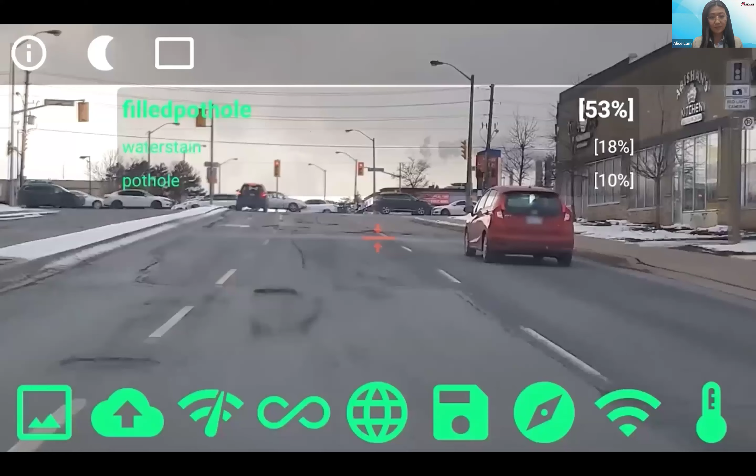Rover is a smartphone mounted on the windshield of a vehicle. We use the device camera to inspect the roads. There's a box that flashes every time it sees a pothole, and it does it a lot faster and more efficiently than a person does. Rover analyzes about 50,000 pictures per hour.

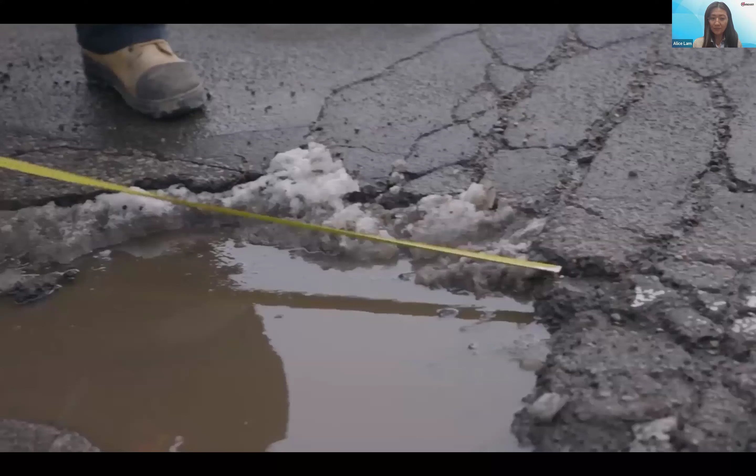Prior to the Rover program, we had to drive around, find the pothole, write it down, get out, and measure it. Patrollers patrol by themselves, so there's no one there to watch your back as you're getting out and doing this work, especially on a high volume road. With the Rover, you don't have to get out of the vehicle, it's all recorded, and you're much safer.

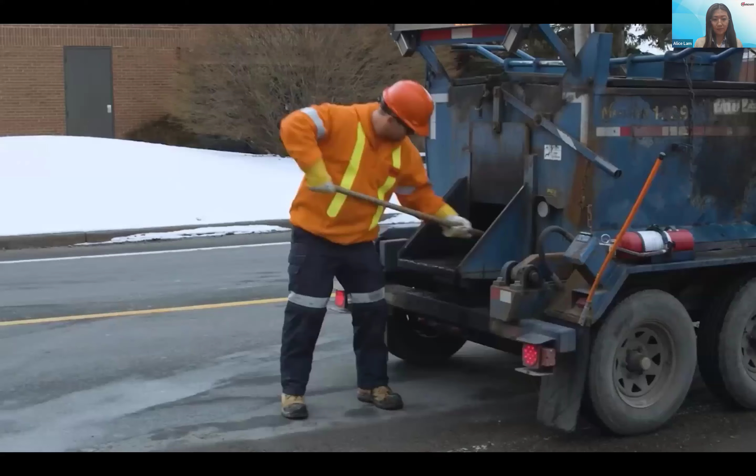Back here at the office, we see the information that's uploaded to the database. We see images, pictures of the actual potholes along with the GPS coordinates, so address, location, time of day, and then we export that data to a spreadsheet and assign information to a crew to go out and do repairs as soon as possible.

I'm not eliminating a job, but I am able to relocate this labor to do other work, such as focusing on other items on the road. By proactively fixing the pothole right when we first pick it up from Rover, within a week, we prevent water from getting in and damaging our infrastructure.

The cost saving is humongous. Working with over 100 cities in North America, we can quantify that the savings are in the millions of dollars, for cities ranging in all sizes.

Rover is a smartphone technology, and all smartphones are now being phased to use 5G. I do see vehicles using technologies like Rover, like car manufacturers, integrating their cameras and sharing information between vehicles more often, things like what Rover picks up, such as potholes and debris.

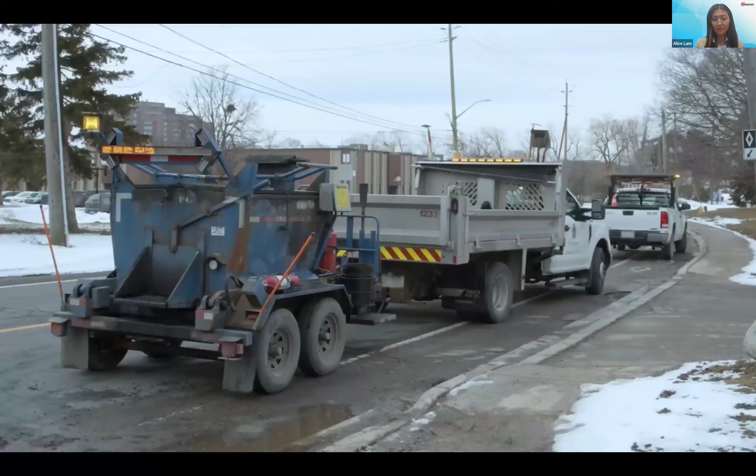Potholes is just the beginning. With the onset of 5G, you're going to see a lot more data being able to be communicated, whether it be pavement condition, manholes, catch basins, signs, curbs, sidewalks. With 5G coming, it will really allow all this technology and the AI industry to expand to the next level, to cover a lot of different tasks in our daily life.

Thank you, Roy. And usually after this presentation, I'll provide a disclaimer. In the City of Markham, we usually do not repair potholes when the road is wet. But you know, this is actually a short video clip that we filmed in partnership with BBC Earth

documentary for the future of 5G. For the filming on that day, we had some water on the road, so I always like to say that. And so maybe this is the first phase.

Today's presentation is going to be in different sections. The first section will talk about this AI CityRover pothole detection technology. Then a different section will talk about pavement rating and what we're getting into.

So how and why we started with this program. When we were in the City of Markham, when we were first approached by Visual Defense with this idea of this AI technology, I met with all my frontline supervisors, and we were saying that, wow, if this technology really comes out and is successful, it will help us in such a great deal.

It will help us with our time. It will help us to better manage our roadway assets. So why is that? Because there's an Ontario legislation, 239/02, named the minimum maintenance standard.

This minimum maintenance standard outlines different requirements for municipalities to maintain our roadway. It talks about the paved surface, what is a pothole, and it also outlines the patrolling frequency for a municipality, how we patrol our roadway and what type of roadway should have what kind of patrolling frequency.

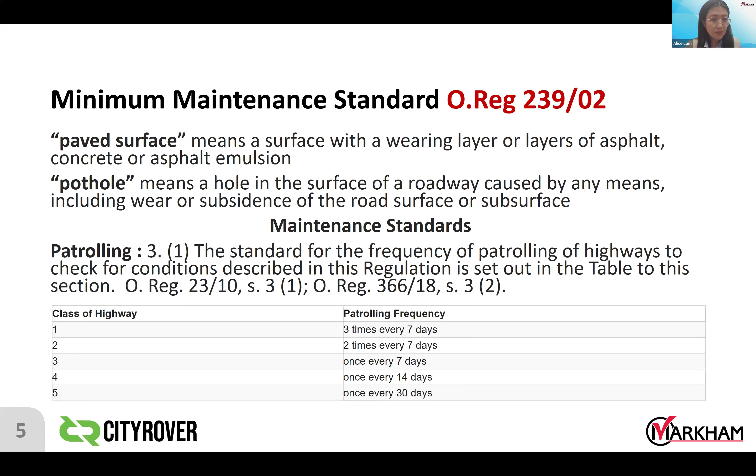There's also another Ontario regulation that governs our type of work, which is asset management, Ontario Regulation 588/17. Road pavement is a core asset per this legislation. So what it means is that each municipality and government needs to have an asset management plan set aside for these core assets, and roadway is very important to our daily life.

No municipality wants to show up on the CAA worst road of the year list. Markham is no different. A little bit about Markham: we are also one of the municipalities experiencing significant growth, and we currently have over 360,000 in population.

As I mentioned earlier, all our pavement structure is paved road, over 2,200 lane kilometers. So with such a big network and such a big population, our clients also have expectations of our roadway, and with the ever-growing need, growing our tax base is not always the only solution. So we're trying to find how can we do more with less, how do we do more with our existing resources?

So now it's time that we need to leverage and tap onto technology. In pavement management, oftentimes we need to look into the right technique for the right location and apply it at the right time. It's not a one-formula-fits-all approach to pavement. It really depends on the pavement rating and the condition of the road, then we tailor-made and custom-made solutions to address the deficiency.

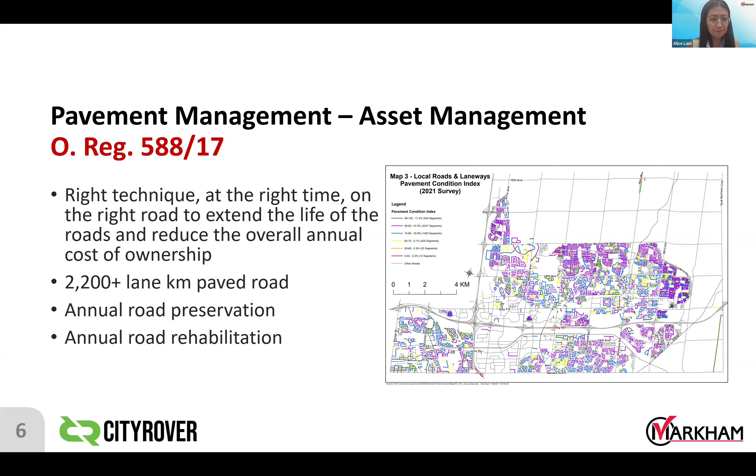I use the scenario of our rooftop. If a strong wind blows off the shingles from your roof, most homeowners, the asset owners, will fix it right away to prevent water from getting in. If you don't fix the shingles, water is going to get in. When water gets into the plywood and then later into the side of the house and into the foundation, now we could be potentially looking at entire roof reconstruction or remediation work for the whole house.

Same with our structure. The moment we are able to address and patch up the pothole, it's actually helping us manage our assets. It prolongs our assets. If we leave it too long and unattended, water can actually go in, and over our Canadian winter and summer, the freeze-thaw cycle will lead to expansion, creating more potholes and further deteriorating our pavement structure.

So we believe in preventative maintenance. We believe in fixing the small issue and providing the maintenance that can help us prolong our assets.

Our collaboration experience with Visual Defense on CityRover has been a very promising one. We are the first municipality, along with Richmond Hill, to pilot this technology, and this technology opened our eyes. At the beginning, AI - I think that was around four years ago - many people were very new to the AI industry. But like I said earlier, if this technology really flourishes, it helps the entire Ontario Public Works.

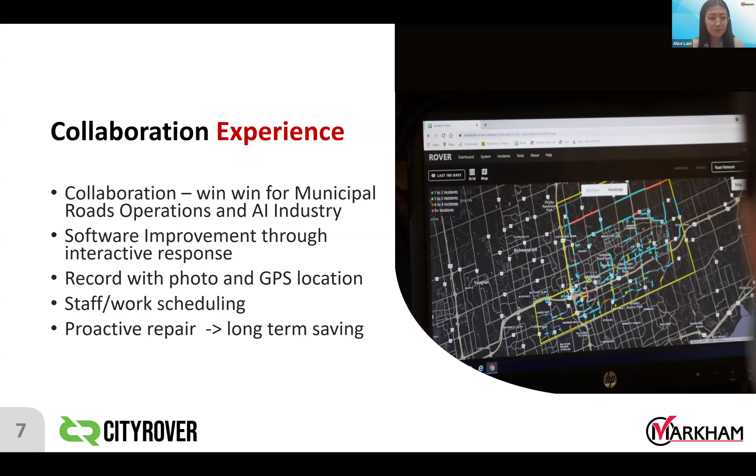So the CityRover AI pothole detection won a number of awards: Technical Innovation of the Year by OPWA, Engineering Project of the Year under the medium category with the Professional Engineers Association, the IDC North America Smart City Award, and also the Ontario Good Roads Association John Neary Better Practice Award under the innovation category.

Next. So ever since CityRover pothole detection, that's the first generation. Oftentimes people ask, so what's the difference between different phases?

So the first phase was detecting potholes. Then we actually expanded beyond that, because it opened our eyes, thinking, wow, technology these days can do pothole detection, but it can also detect a lot of different things now. It can help us detect manholes, signage, and maybe other types of deficiency out in the road, which better helps us record and manage our tasks.

For manhole winter maintenance—I don't know how many of the audience are in the winter maintenance industry—when a manhole sticks out above ground and a plow truck comes in, we know who's going to lose that fight. Our truck is going to lose the fight. The manhole is going to stay put. If the manhole actually lifts, when the plow comes in, it's going to damage the equipment.

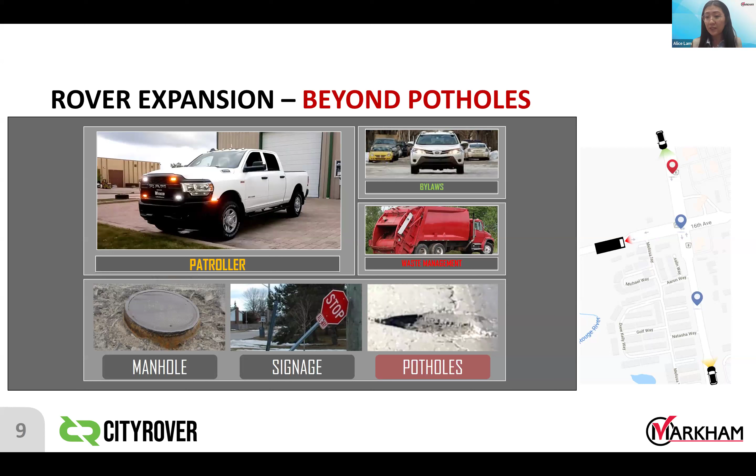With the software able to pick up some manhole deficiencies, it allows my team to go out and do proactive adjustments. So when it comes to winter maintenance, when my plow truck comes along, it's going to help us prevent some of these equipment damages or even infrastructure damages.

Next. Now I'm going to pass the time over to Roy Tal to cover the next section from Visual Defense.

Thank you, Alice, and hello everybody. So as Alice mentioned, we have a few sections. The first section covers the first phase of the project, which we covered in the technology showcase.

And after this phase, it will go back to Alice to talk about the Pulse technology. Alice's portion usually revolves a bit more around the specific use cases within the City of Markham. The CityRover visual defense portion is a bit more general, in terms of some trends and ways that we see this technology used across cities in Ontario, Canada, and beyond.

So in a few words, CityRover is an AI camera and a cloud service. You basically put this camera into any vehicle, and it essentially transforms that vehicle into a data collection technology. Just very briefly about myself: before we got into municipal operations and public works, Visual Defense was actually a security provider.

I've been with the company for about 18 years, and I was responsible mostly for implementation of security projects in transportation—CCTV systems, camera systems in airports, seaports, as well as other systems supporting those security systems in place. All of the projects I've done have essentially been in the transportation sector.

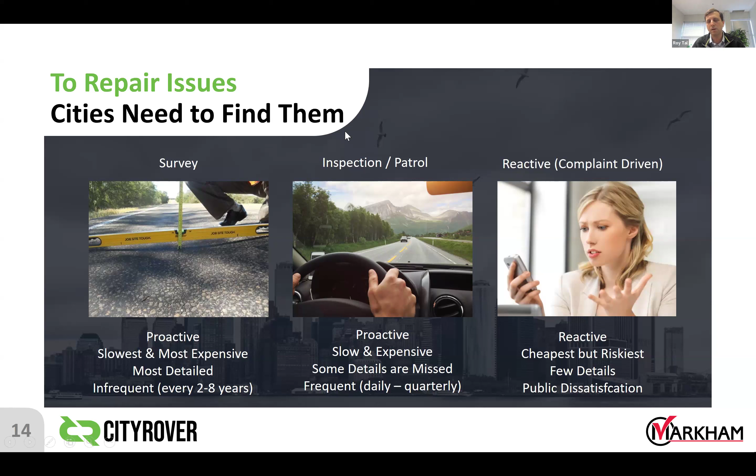So if anything is missed and there's an issue that causes some sort of discomfort, risk, or injury, usually the public becomes vocal and mentions it, and you'll get a call if you're in a city, or a ticket opened on the portal, depends on what you have, and somebody will complain. So those are the ways that we learn about issues: either it's detailed and slow, frequent but challenging, or whatever is missed is reported by the public.

And we like to say that the first step to fixing a problem is knowing about it. So once you know about it, there's the rest of the process that takes place. Usually there's a service request that gets opened with a particular department - it could be the roads department, the waste department, the water department, depending on the type of issue that comes in. That then translates into a work order, which can include one or multiple service requests within an area. And then the crews are ideally moving in to start taking care of the issue, and then moving on to the next. So this is the process today for most cities.

It can be paper-based, meaning everything is logged by paper. It could be that it's logged digitally but assigned by paper. It could be using tablets and asset management systems and work management systems. So there's a lot of different ways that different cities deal with this. But as we mentioned, the first thing is learning about the issue.

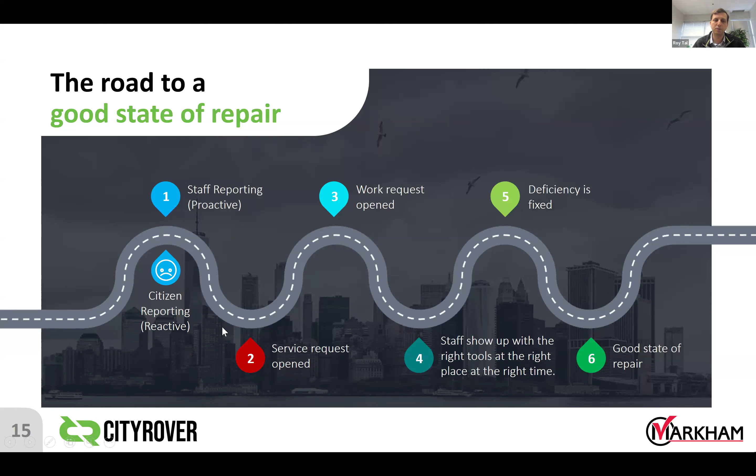And this is where the CityRover third generation technology comes in. It's basically our AI platform - a camera that goes in a vehicle, and any city can install this themselves. We work with cities as far down south as California in the States, as east as Newfoundland and Labrador, and as west as British Columbia. And we just ship them these kits.

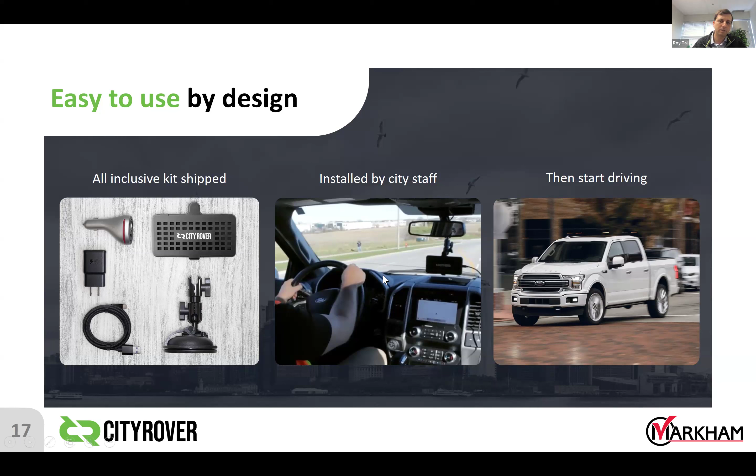The city staff install it on the windshield, and when they drive, the CityRover technology starts to assess the infrastructure in near real time. So as soon as the technology identifies a pothole, for example, it will snap a picture and upload it onto the cloud. And on the cloud, there are different ways to address it.

So either it's a hazard-based approach - each issue, the system will try to catalog it as high priority or low priority, and then that goes to a person to review. That person either agrees that it's a high priority and assigns it to a crew, or disagrees and moves it down to low priority.

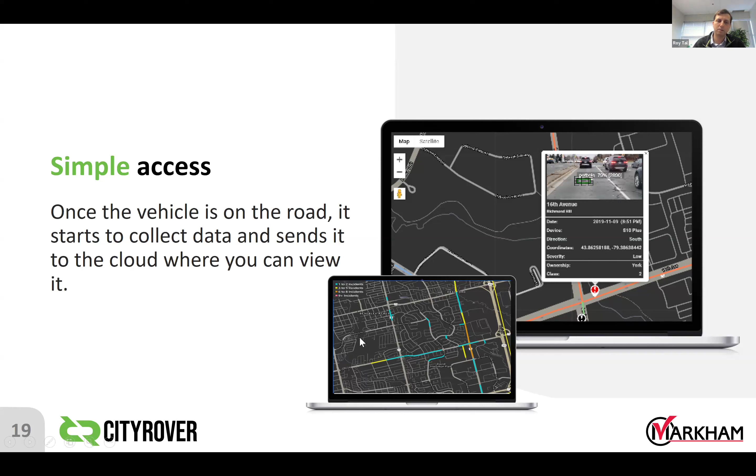So there are different ways that cities address this. One is priority driven, basically to keep the roads safe and hazard free. And the other is productivity driven, taking the staff that we have and applying them in the best possible way so they can fix the most issues per working hour as possible.

And we like to say that the CityRover technology doesn't just identify a higher quantity of issues, there's also a higher quality to the data. So now each issue that gets identified also includes pictures with estimates for the size and depth, the GPS coordinates, the nearest address, the date and time, the side of the road, and so on.

So we used to hear a lot about cities getting service requests where somebody says there's a pothole on my street, and then the truck comes in - the truck has this hot box or a trolley that they have to pull behind - and they miss the pothole and have to circle around to get to it.

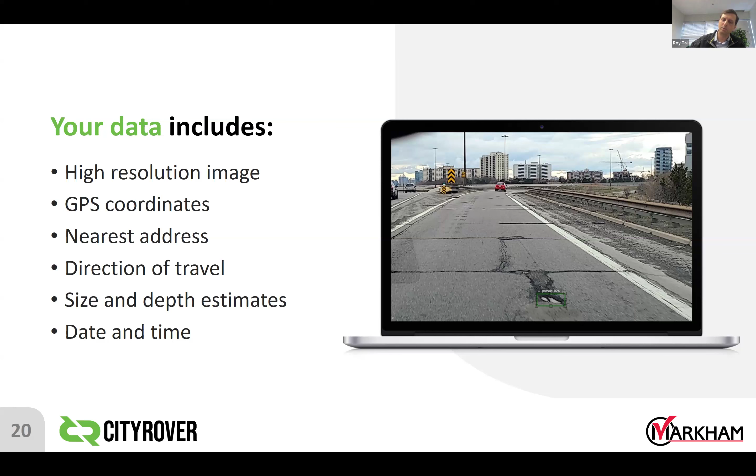Now you don't need to do it. You have it available right in front of you. So that's one very useful way to apply the technology.

We've worked with the City of Markham since 2020, so it's our 4th year now partnering with them on advancing this technology. When we started, we used to call this a pothole detection system, but we quickly realized that cities want to know about issues, and they also want to fix them.

So it's not just about the detection, but about how we can take this data and act on it in a better, faster, more efficient way. This technology has evolved. Our third generation technology is now called a maintenance operations platform, which helps automate the generation of service requests for certain types of issues using artificial intelligence, like potholes and manholes, but also...

helping with the process of automatically cataloging them, making them available for review, and disseminating this information to work crews. That could be opening a work order with one of our companion applications, or printing it out onto a paper that the repair crew can take and use to get to the place and mark it as complete.

It can be heat maps that show which areas in the city have issues that need to get taken care of. A lot of cities have also invested in infrastructure management systems, asset management systems, and they want to take this data from the CityRover system and bring it into those systems as well.

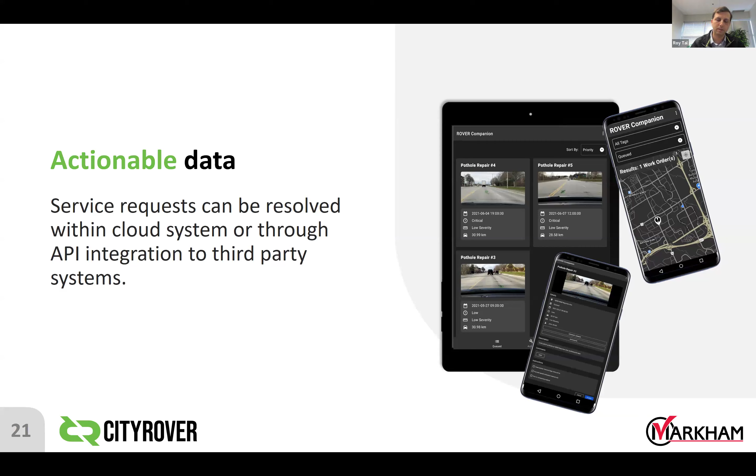We've seen all sorts of exciting things that cities have done with this data in terms of moving it to different systems. With our third generation technology, we now have cities using street sweepers, patrol trucks, garbage trucks - those are now inspecting the roads.

We have service requests that are generated automatically, so a person doesn't need to punch it in - it just gets essentially automatically opened. Then this information can get attached to a work order, as we talked about, paper-based or electronic.

When we go and take care of these issues, we have essentially all the information - what we're dealing with, how many we're dealing with, where it is - and we have all the information to support more efficient use of the work. We start to track how many potholes we fixed, how much time was used today to close these.

You can start tracking all of these things, and based on that, quantify how you've done this year compared to last year. For example, a lot of cities, before using the CityRover system, estimate how many potholes they patch by how much asphalt they bought the previous year.

But sometimes they don't use all the asphalt. So it's nice to have a way to tie the issues that came in, how many you've dealt with, how fast you've dealt with them, and how it was assigned.

With this data, you can go back and report to council or senior leadership and say, this is what we could accomplish with our current staff. If you want us to accomplish more, we will need this. Otherwise, this is how we've improved compared to last year, and this is what we've done. We're seeing a lot of that - it's a tool used to show the work you've done and demonstrate it.

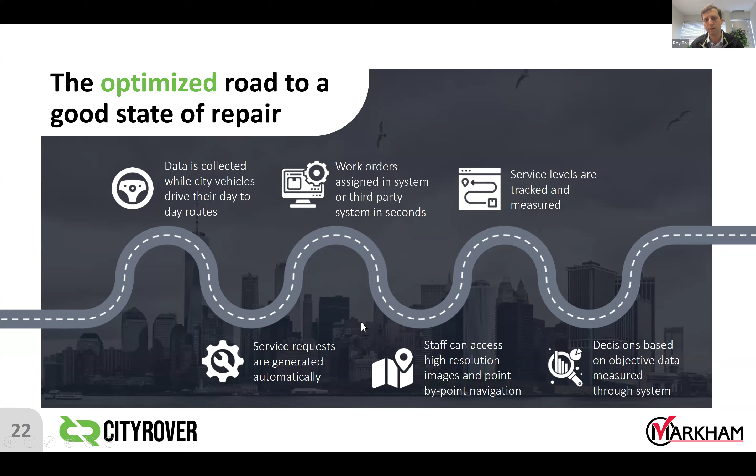Just a few quick KPIs that come from some of the cities we've worked with. We're seeing a trend where, generally speaking, 80% of the problems out there are unknown, sometimes even more, depending on the type of infrastructure.

But if you're relying exclusively on citizen complaints, you can assume that there are 4 times more issues out there that you don't know about, compared to using this technology.

The second thing we saw, which is one of my favorite experiments, one city did. They gave their service ticket folks access to check the system every time they got a service call about a pothole. They found that 96% of potholes were captured by the system before people complained about them. This was a city with about 100,000 people in Quebec.

In general, by only sending your crews to areas that have issues and not having them circle around, you can get up to 100% productivity boost, meaning they can fix twice as many issues within the same shift.

In general, we've partnered so far with more than 300 cities in Ontario. It's Ontario-led, so we're an Ontario company, but also in Canada and beyond. Being proactive and digitizing your infrastructure issues is emerging as a best practice now, not just in Ontario, but in other Canadian provinces as well.

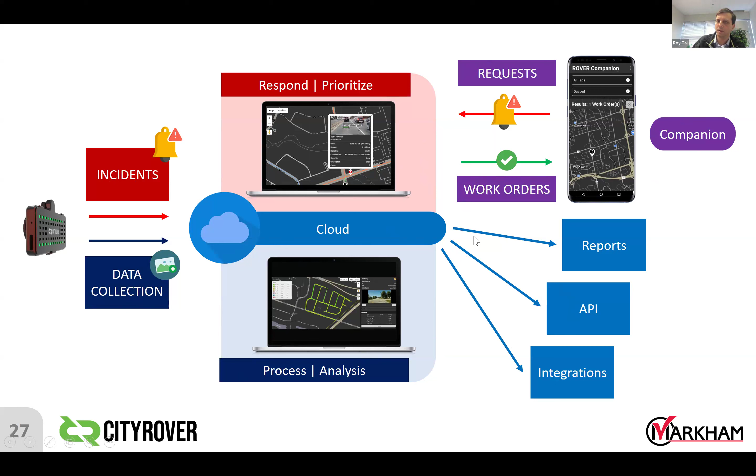The red is the first part of the presentation. The purple is our companion app that lets staff members, like the patrollers, report things that the AI doesn't cover, and it goes into the same platform, as well as issues that can get assigned to work crews. The Pulse is actually our data collection and analysis platform. It uses the same camera and the same cloud, but it's a separate service being provided, and all this information can get synced to other systems.

And with that, I'm going to pass it back to Alice to talk about pavement. Alice, your favorite topic is coming up.

Yep, next slide please. So are you guys ready for what is the latest and the greatest? We drive in the public sector, and most of the time we drive on public roads, and oftentimes we can drink our coffee, and then sometimes depending on the bumpy road, you can spill your coffee on yourself.

So what is pavement rating, and how do we classify that? Earlier I talked about the day-to-day. Now we're taking a step back, looking into the civil engineering. Usually we assess a road based on its pavement condition index. It's an engineering equation that starts out from 100, and then as each deficiency we pick up, we subtract that from it. Next slide please.

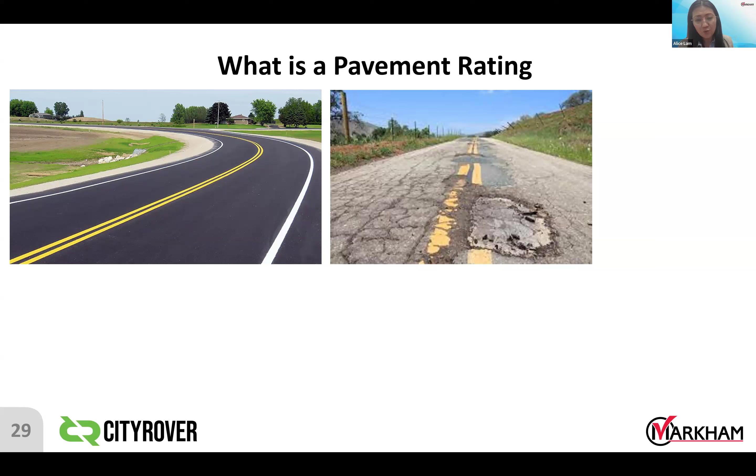So what is pavement rating? On the right-hand side, we can tell there's a lot of deficiency, and on the left-hand side, there's a newly paved road, so it's good. When we say a pavement is not good, there are many different types of deficiency our pavement structure could experience. Some could be longitudinal cracking, some could be alligator cracking, and some could be significant potholes, sinkholes, and depressions. Each type of pavement deficiency requires a different type of solution, and the time to address it is also different.

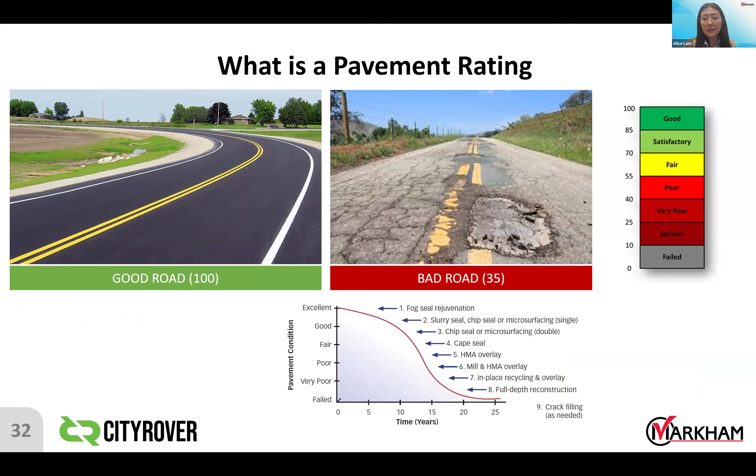Next slide please. So in this scenario, looking at the picture of the newly paved road, the PCI, pavement condition index, would likely be 100 because there's no deficiency, so nothing to subtract. We classify that as a good road. On the other side, you see alligator cracking, potholes, and some longitudinal cracking.

And the other thing is a road could be very long. Let's say, talking about Yonge Street - Yonge Street spans different municipalities, but the entire Yonge Street won't have one PCI.

Different sections of the roadway suffer from different types of deficiency. Usually in pavement rating, we talk about the segment of the road. In this bad road example, if the pavement condition index is at 35, it will require a different type of solution. A PCI of 35 is considered very poor.

In this situation, we may be looking into reconstruction of the roadway. Pave and shape, what we usually call pavement resurfacing, may not be able to solve the problem here. There are many different tools in our toolbox to fix pavement, such as micro surfacing, crack and seal. But for this type of roadway, using crack and seal would just be throwing money away. It's not going to help.

That's why knowing the root cause, knowing the pavement rating and condition, is fundamental for the industry expert to identify what to do. It's no different from going to a doctor - you need to know what the issue is before the doctor can prescribe a medication.

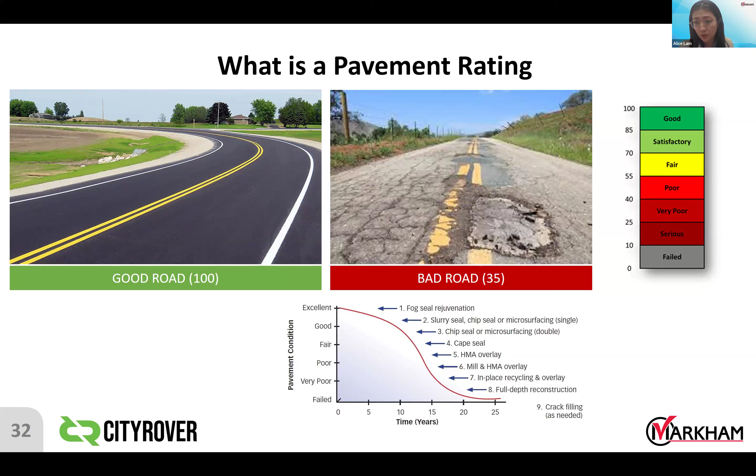Oftentimes how we determine pavement rating is by sampling an area, identifying deficiency and severity, and then plugging that into the engineering equation like I mentioned earlier.

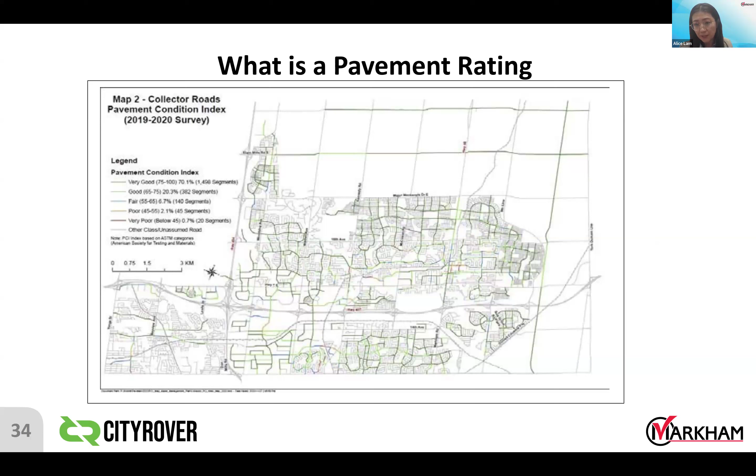This outlines what I talked about earlier regarding Ontario Regulation 588/17. In the asset management plan, each municipality is required to document our core assets and their condition, and set money aside to make sure these core assets are looked at, rehabilitated, and replaced.

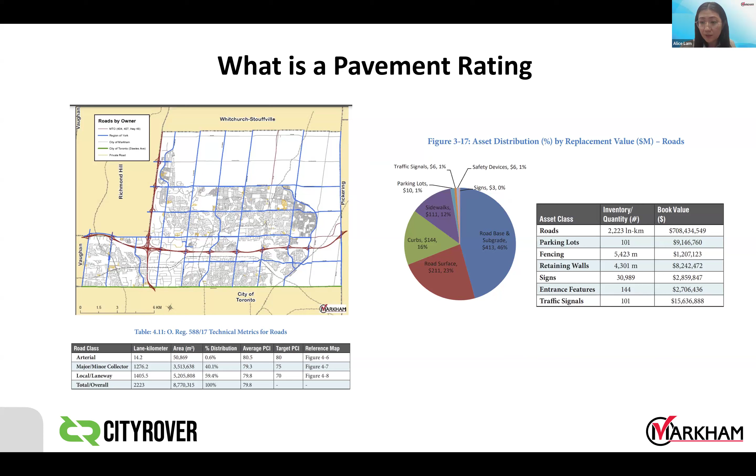Now I'll talk about before CityRover, this pilot - we are currently in a pilot process. So prior to that, what did City of Markham traditionally do?

Every 2 to 3 years, we hire a contractor to do a laser condition index - like the picture, mounted with a laser - and drive through the entire city network doing a scan. This scan picks up deficiencies like alligator cracking, potholes, minor cracks, hairline cracks, and that kind of thing.

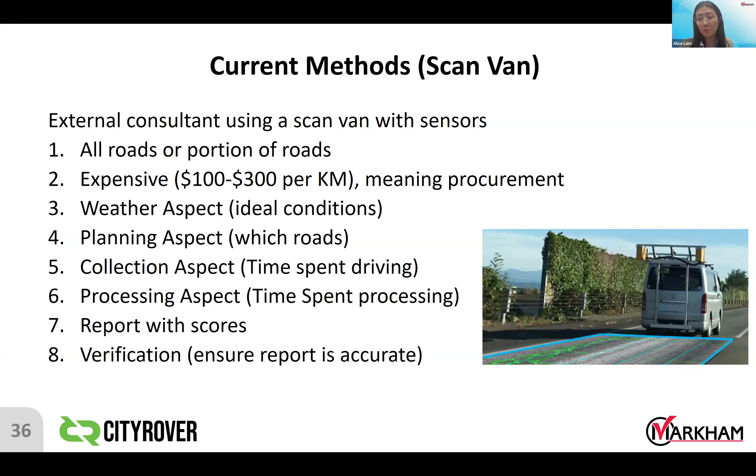Of course, the results oftentimes may show us some error. And it's time consuming, because you have to drive through the entire network, and in that one round, if a certain part of the city is under construction or closed, the truck won't be able to get the PCI rating for that segment.

After that, we have our inspector go out to look at the road to verify if the PCI rating data coming back is accurate, because oftentimes with machines and with humans, there's bound to be error. The city gets our PCI rating every 2 to 3 years using this current method.

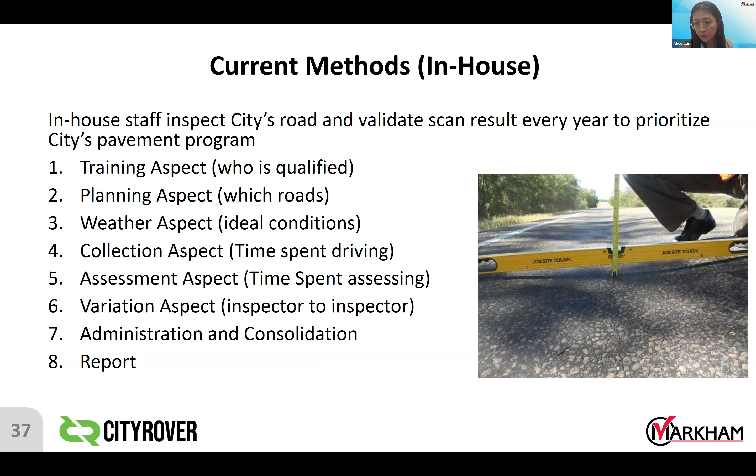So what if there's a better way? What if there's a better way that we don't have to wait 2 to 3 years? If we receive a resident complaint, we could send a truck out and assess the PCI right away.

And then streamline it, because right now the truck collects all this data - I have a huge database. I need to plug it into the engineering equation and process all of this in order to get the PCI and then map it. What if all this could be streamlined into a simple software? That's what we're exploring right now.

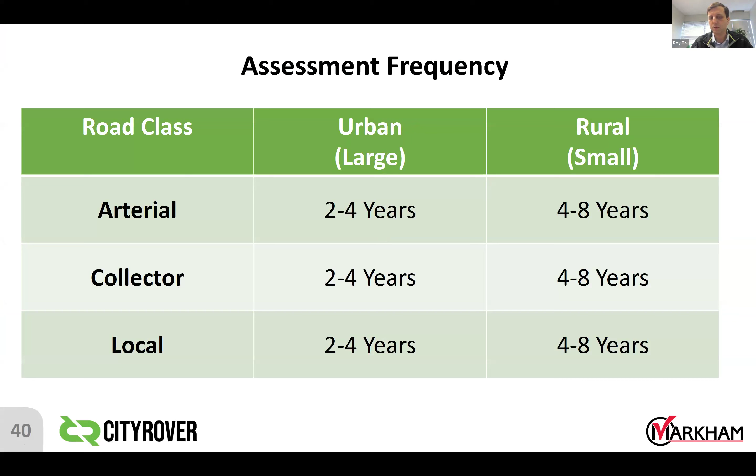Markham, for example, does all the roads every 3 years, but we found there's a range of how often these roads are done, 2 to 4, 4 to 8, and it just gives you a snapshot at a particular time. What we saw is some cities will do it on a cyclical basis, meaning they sample. One city may do all the roads in 1 year every 2 years.

Another city may break the roads into chunks of like 20 to 25%. They will not check any roads that were recently paved, and they will start alternating through the remaining roads on a 3 or 4 year cycle. Their in-house staff go in, assess the stuff, look for alligator cracking or other cracking, note it down, and then use that for their planning and budgeting.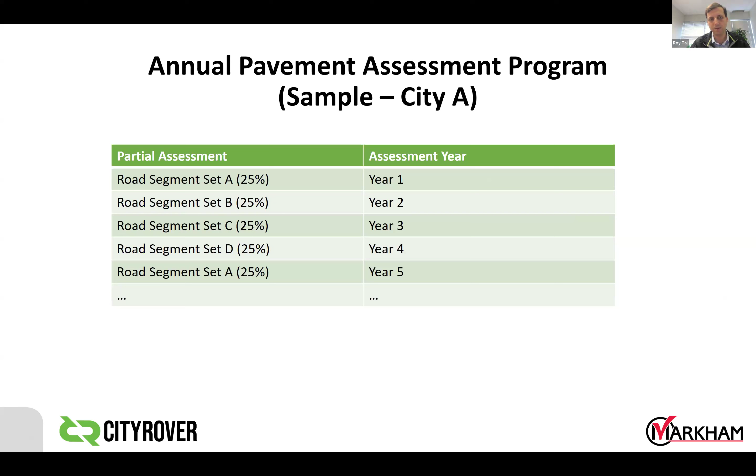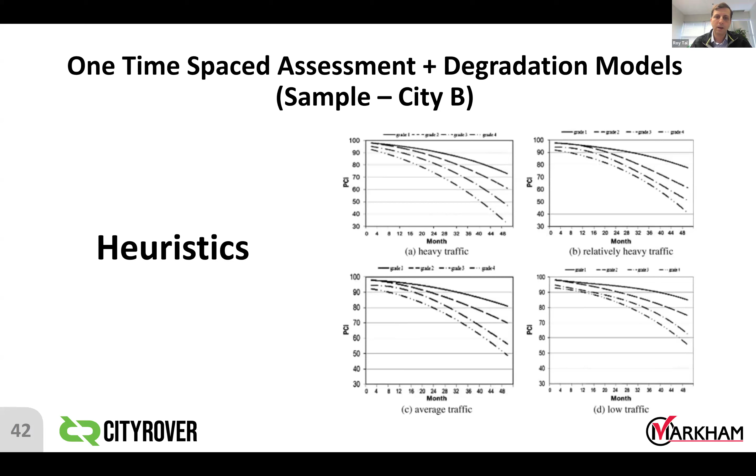So that's another way we've seen asset management being used, when it's done in-house. I actually saw some of the larger cities will do the assessment and integrate it into modeling. So if you have a sophisticated asset management system, there may be predictions based on traffic or the classification of the road that tell you where it's going to be at a particular time. This is being used for modeling as well. But all of these methods are very time consuming and require a lot of work.

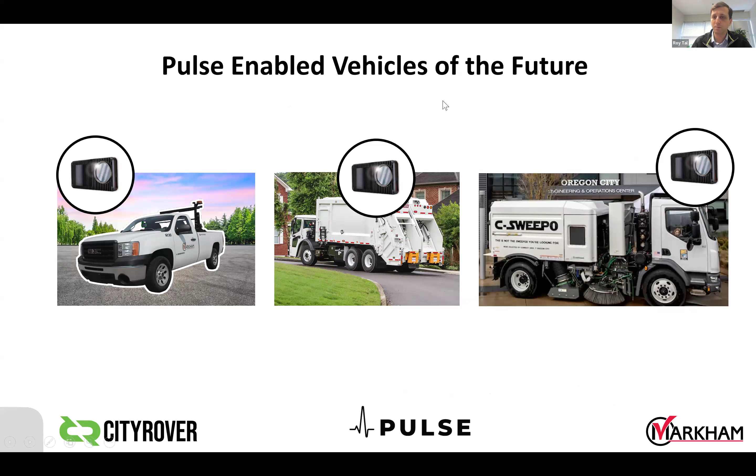And this is where the CityRover Pulse comes in. The same cameras we talked about, whether it's a Markham patrol vehicle, as you see here, or a garbage truck in another city. There's even a street sweeper called C-Sweepo, which is supposed to be a Star Wars name, that has a rover that drives around and collects data.

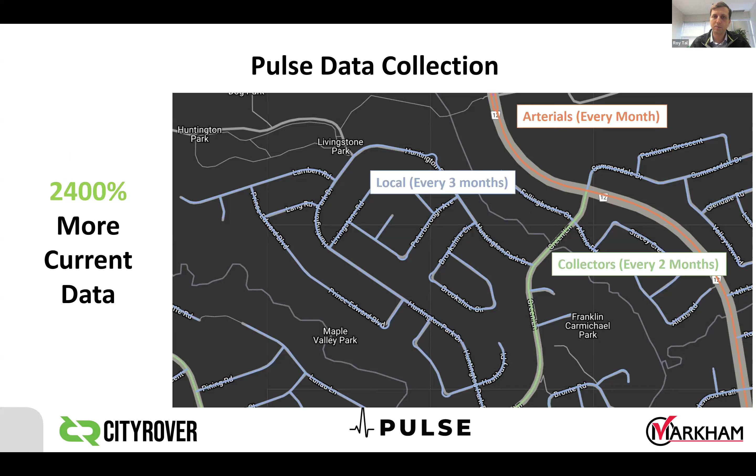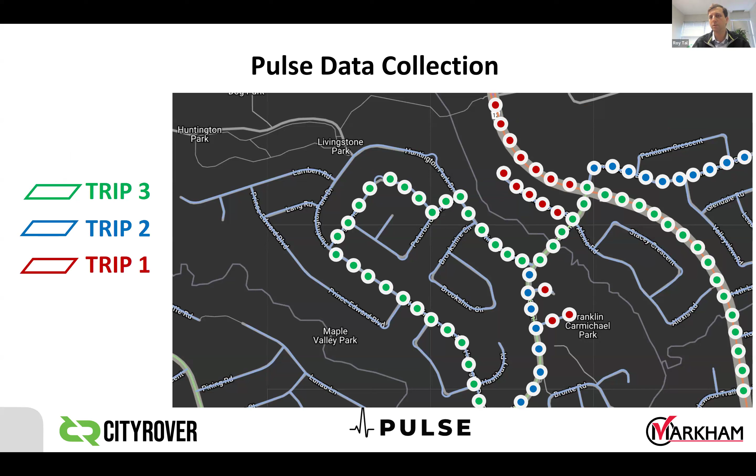The idea is we have different types of roads, and we can use these vehicles to always collect data for these roads. So we always know if we want a report on any particular road, the data is right on hand. For example, we can have a patrol vehicle driving through doing their MMS patrol, a garbage truck on a garbage route collecting additional data, or a street sweeper that goes through. It could also be the same vehicle over multiple trips, but each one collects data.

And what the Pulse does is generate what we call a continuous snapshot. So from all these different trips, we assemble one snapshot that has all the most up-to-date data for all the roads. The most recent data from all the trips is visible for us.

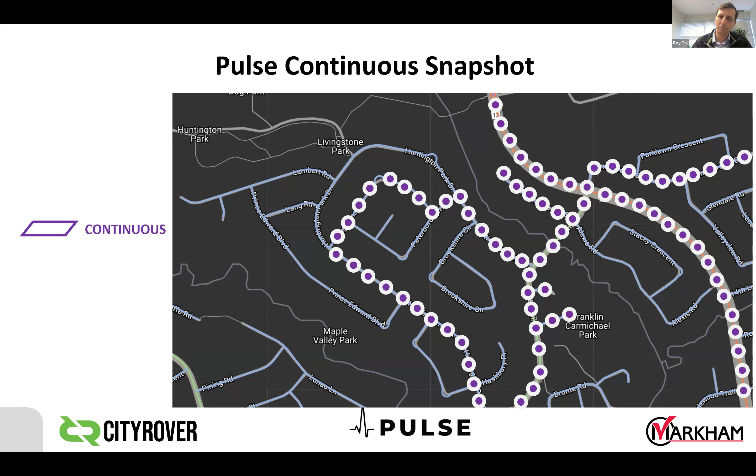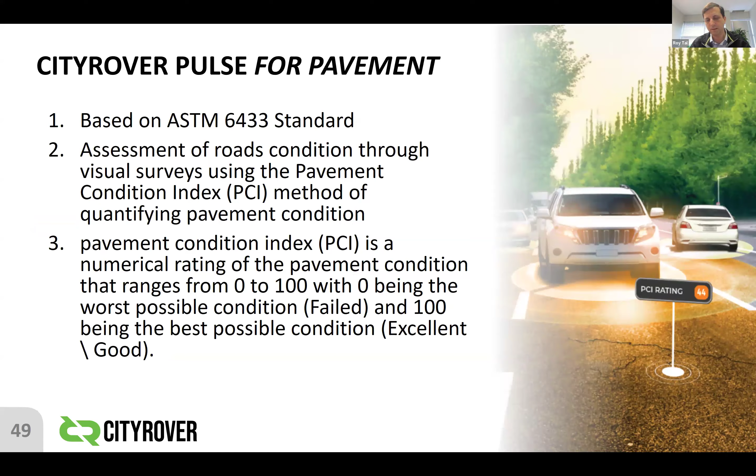And with this data, we can start to apply pavement ratings. So we take the data—part of this is collecting the right data at the right time at the right place—and then we process this data to generate reports using artificial intelligence. We can use standards like the ASTM standard for this, I think the 6433, the simplified version.

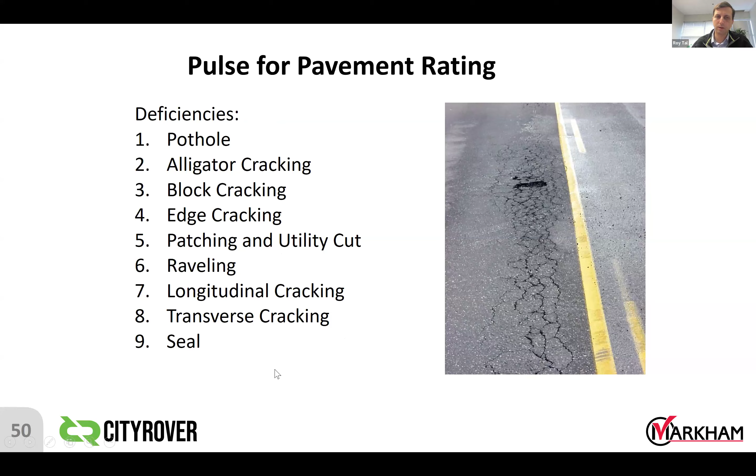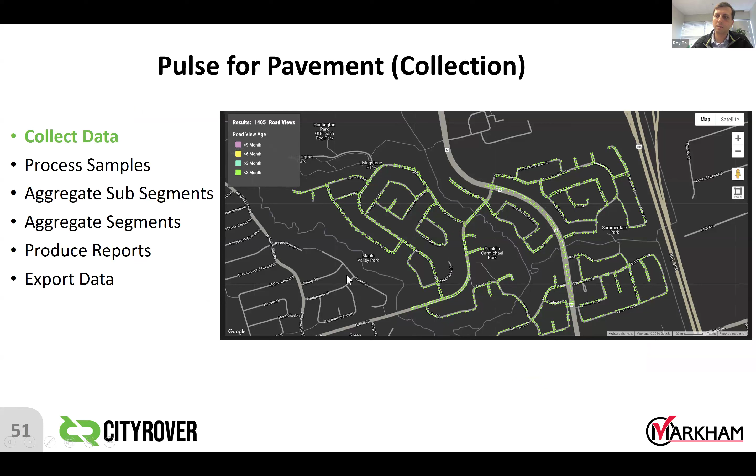This is actually a neighborhood we scanned with Markham. We had the patrol vehicle going on patrols here. This is the data that gets collected, and you see the data has an age—it's all fresh data, less than 3 months. Every time the vehicle goes through, if that road is due for recollection, the data gets recollected automatically.

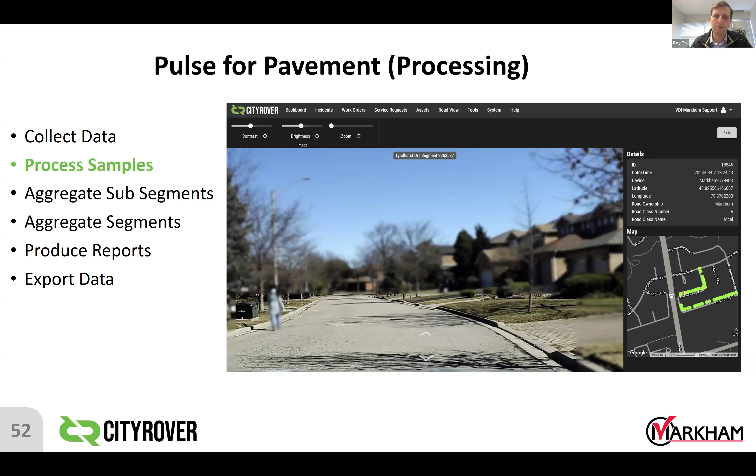We do maintain privacy, so we only capture the road. We can basically blur all the houses, people, and cars, and this is completely done by artificial intelligence. So the data is nice, clean, and safe, and then it gets assessed and the ratings take place.

So we have the different types of issues identified on the road, which are then applied to the data we collected. And this is what this neighborhood looks like after it was processed—it was collected just on a day-to-day patrol.

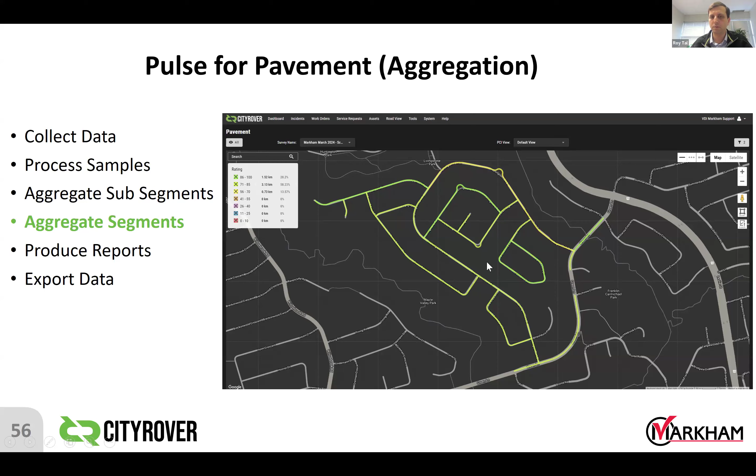The data can then get processed, amalgamated to subsegments, and then onto segments, which are the units usually used to quantify a section of the road. And then essentially this information can get exported into a file.

It shows you essentially this is the road that we wanted, this is how many samples we collected, and this is how much we could have collected. Why would you not be able to collect some samples? Maybe the pavement was wet, or maybe there was a car parked and there wasn't enough pavement visible, so the AI rejected it. But at the end of the day, we see what percentage we have for the sampling.

And over time, the sampling gets closer and closer to 100%. The more drives you do on the road, the more full the picture you have of the road.

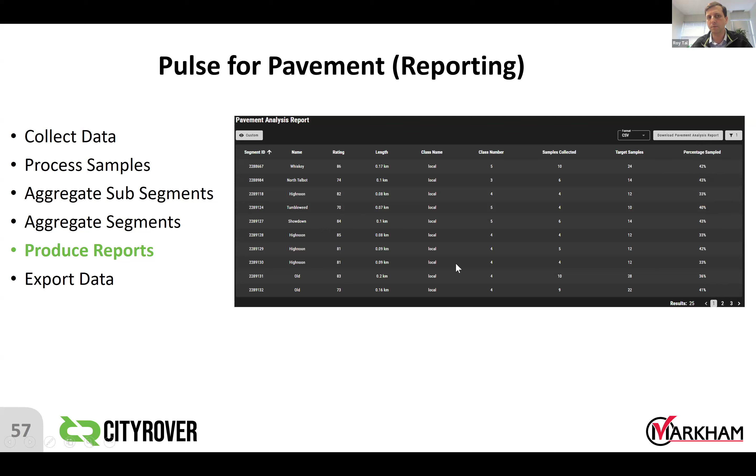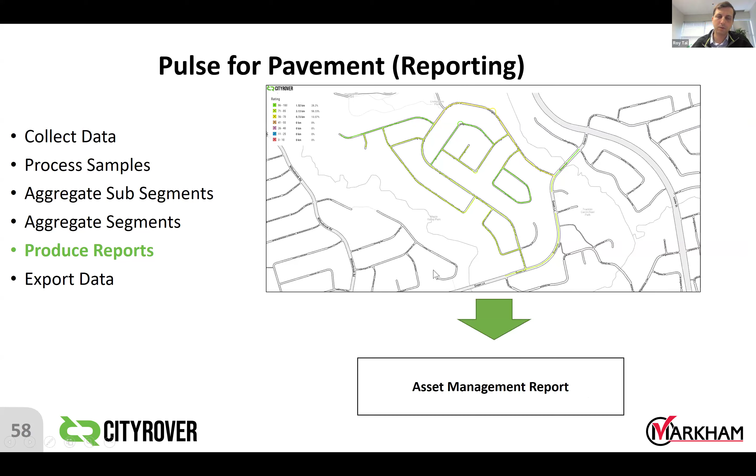And then essentially this can get into these maps, which is similar to what you've seen on the Markham asset management plan. So you have essentially the roads and their conditions, and you can also convert our rating to whatever system you use in place. And then this information can be used for reports for budgeting, for showing to council, or as part of a project.

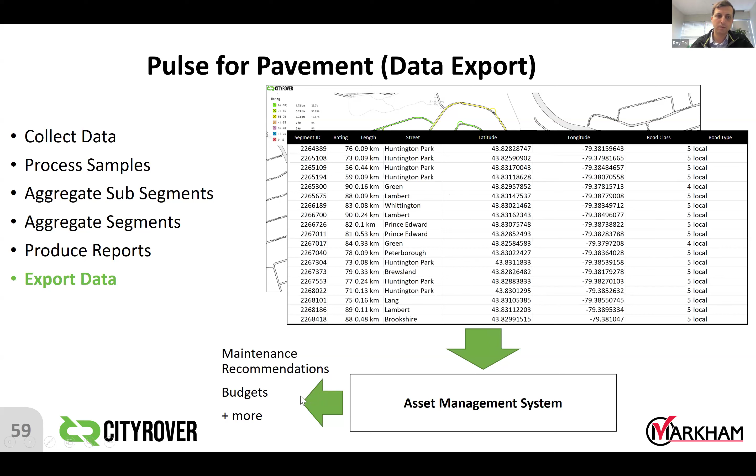As well, you can export this information in a more tabular format, like an Excel sheet. It shows you the rating, the segment, the street name, the location, the classification, and then that can get imported into an asset management system that allows you to plan or get the recommended treatments for those roads as well. So that can be used also for budgeting.